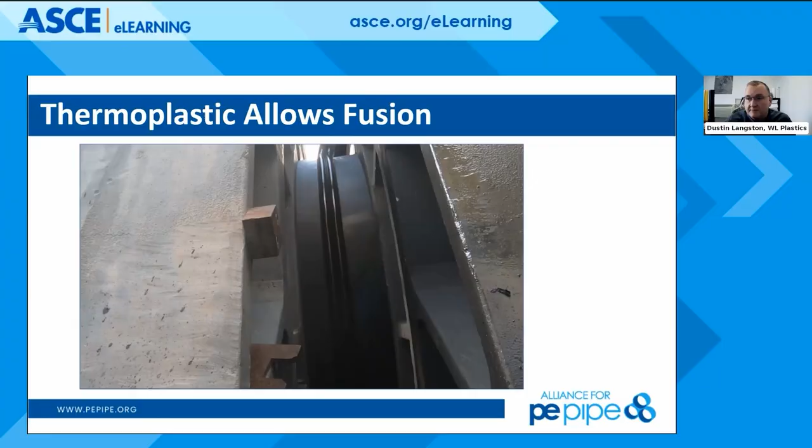And the reason this is possible is because HDPE pipe is a semi-crystalline polymer. It has regions of crystalline structure, and then it also has amorphous regions. This really makes for the best of both worlds, where you have a very strong material with high pressure ratings, but the amorphous regions help with ductility of the pipe. So you have a very good balance between strong yet flexible.

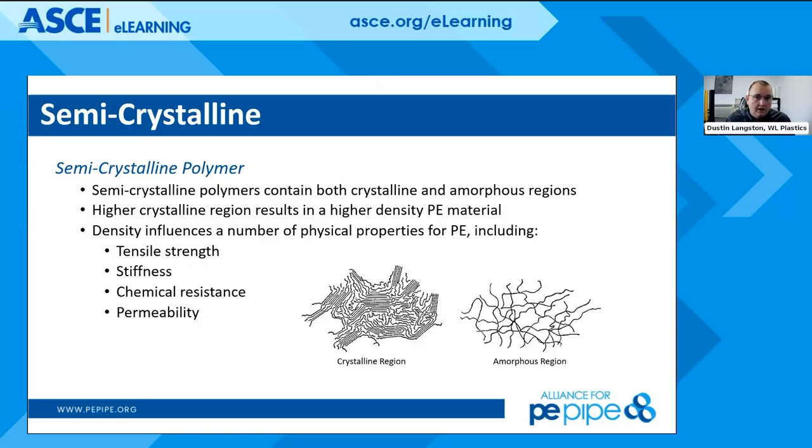But with that comes a little bit of a different mentality in how you think about plastic pipe. PVC and HDPE, both plastic materials, stress over time. It's not like a metallic where you have a tensile strength and then take a safety factor of some kind. You need to understand that with all plastics, you're going to have strength over time. So when you're doing a burial design, for example, you use the apparent elastic modulus for the length of time it's being installed - the 50-year, 100-year modulus, which is 29,000 PSI. Now if you're taking very short stresses, then you take a higher modulus - for example instantaneous, we'll get into that in the surge portion of this presentation, but then you'll take that 150,000 PSI modulus. So just keep that in mind: time versus stress for polyethylene and all plastics.

So Dusty, just for everybody out there, when that pipe is installed in an open trench condition, the soil that surrounds that pipe works together with a pipe stiffness and soil stiffness factor, so that after installation there's no more load on that pipe itself. So that's not a stress scenario once it's been installed, just to elaborate. Once that's buried and especially compacted, you have soil arching that actually takes the load of everything above it. But yeah, thank you very much for that, Alan.

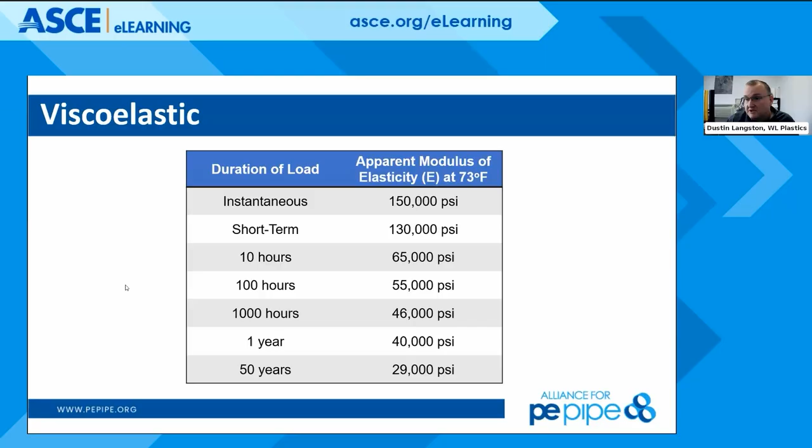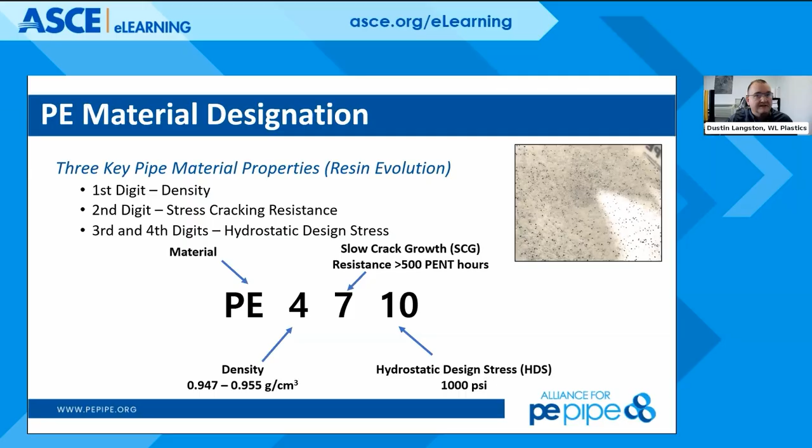So what is PE4710? If you go to order polyethylene pipe, that is going to be the material designation that you'll be ordering. We have model specs that Alan talked about before, and all those model specs call out PE4710. PE stands for polyethylene. The 4 is the density range, 7 is the slow crack growth resistance, or the PENT test value, and then 10 is the hydrostatic design stress. Every material out there now for pressure rated pipe is PE4710. You might still see some older specs from the early 90s that call out PE3408, but those materials aren't really commercially available anymore. Everything today is PE4710. I love this slide.

This data was developed and submitted to the Plastic Pipe Institute, covering all plastic materials for pressure, not just polyethylene but also PVC pipe. So we're going to understand, if we put pressure inside this piping product over a long period of time, what is that going to do to the material?

So for example, the tensile strength for polyethylene 4710 is 3,500 PSI. If you were to put 3,500 PSI of hoop stress on that product, you'd get a very quick failure. So we need to figure out at what point in the very long future can we put pressure in this pipe and just not have a failure.

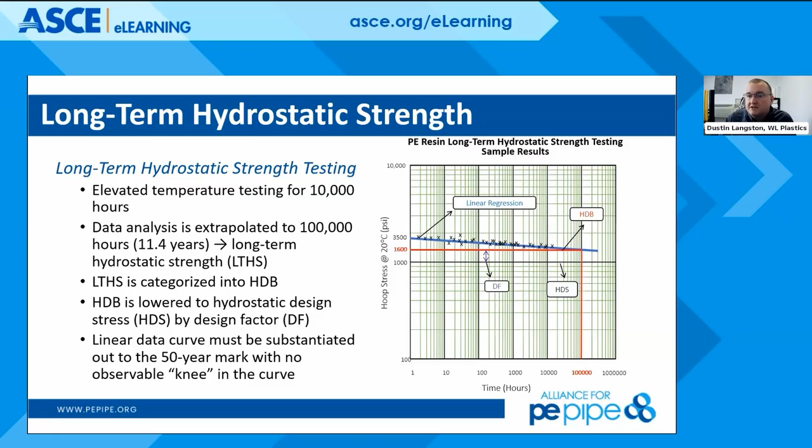Every DR pipe does have a pressure rating that goes along with it. Your most common are DR11, for example, rated at 200 PSI, DR17 rated at 125 PSI. Those are working pressures, what we advertise that pipe to be run at. There's no need for an additional safety factor, and DR11s are often run at 100 PSI or less.

That's definitely overkill. But this is the exact equation you would use to figure out what the pressure rating of your project would be. I will talk a little bit more about temperature though.

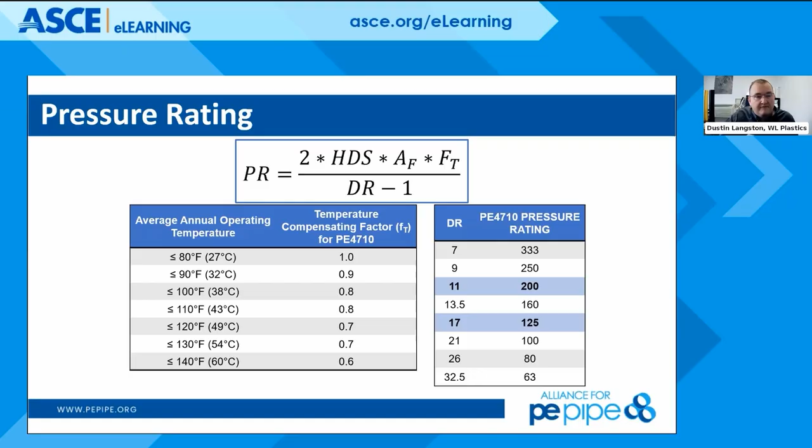I do want to mention anything above 80 degrees Fahrenheit, you start derating the pressure of the pipe. So if you have an above ground application that's going to be out in the sun in the summer, and that pipe's 120 degrees, you use a 30% pressure deration. You can get that from this chart or from the Plastic Pipe Institute handbook.

Perfect, now to the next one. We're going to talk about this a lot today: surge and surge analysis in HDPE pipe. It definitely acts differently than any other pipe material that you're used to designing with.

HDPE pipe, with that lower elastic modulus than our competition, acts as a giant shock absorber. So you actually get less surge in HDPE pipe than other piping materials. The other big difference between our material and others: you're allowed a 2 times pressure rating for occasional surges.

So a DR11, 200 PSI pipe can surge up to 400 PSI. And then for recurring surges, several surges a minute, it's a 1.5 times multiplier. So that DR11, 200 PSI pipe would be rated at 300 PSI.

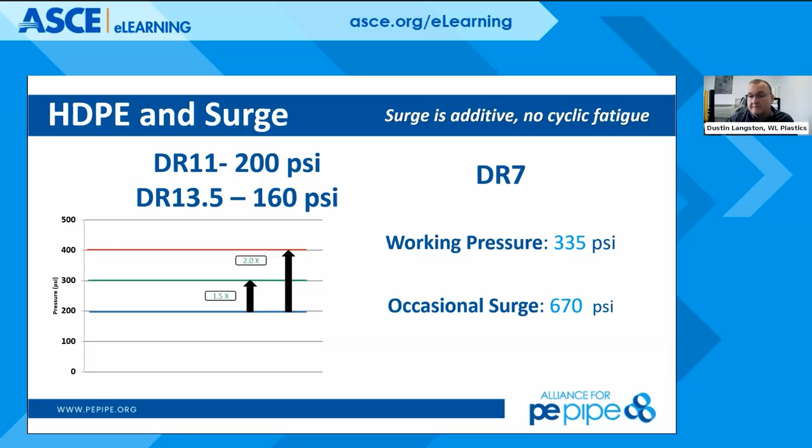DR7 is pretty extreme in this case. That's rated at 335 for working pressure, constant pressure, and can occasionally surge up to 670 PSI. So very, very high pressures allowed.

So what is surge pressure? Surge pressure happens when you have a velocity change inside of a pipeline. Fire flows are by far one of the worst scenarios that you'll come across, where you have a very, very fast moving water column.

And then all of a sudden the pumps are turned off on the fire truck, or a valve is closed, or even, if you're working with other pipe materials, if something were to clog the line and stop flow during a high velocity occurrence, you have a pressure surge, a water hammer event.

And these pressure surges are not just one direction. They actually reflect back through that pipeline. And so with HDPE pipe, again, that lower elastic modulus, we're going to reduce that water hammer through the pipeline. Go ahead, next.

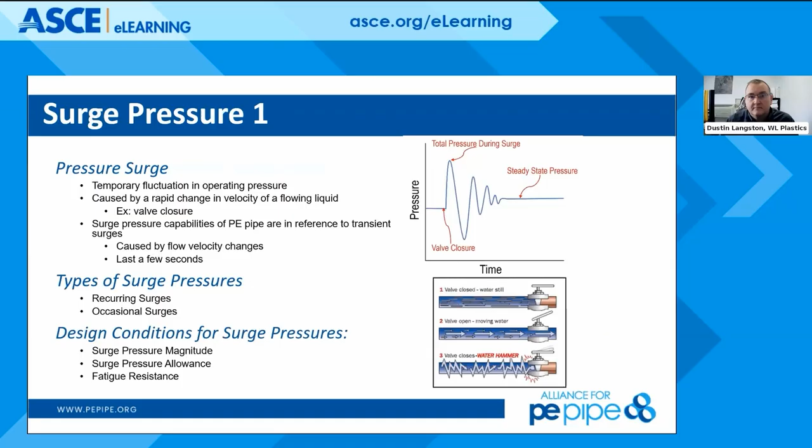So two factors ultimately affect surge: velocity change, and even more specifically, how fast that valve turns on and off.

You can get to very, very fast close times, and that'll actually give you a higher amplitude. But then again, there's the elastic modulus of that material.

Polyethylene pipe uses 150,000 PSI, PVC uses 400,000 PSI, and ductile iron uses 24 million PSI. So that results in a much higher surge in a ductile iron pipe at just 5 feet per second than you would get in a polyethylene pipe.

Alan: Yeah, so that's the exact summary I was coming on to say. Dusty, yeah, absolutely—so the HDPE itself can act as an attenuator in some areas to resist that surge, and that's the viscoelastic behavior we talked about. So you're hitting on all the parts, Dusty.

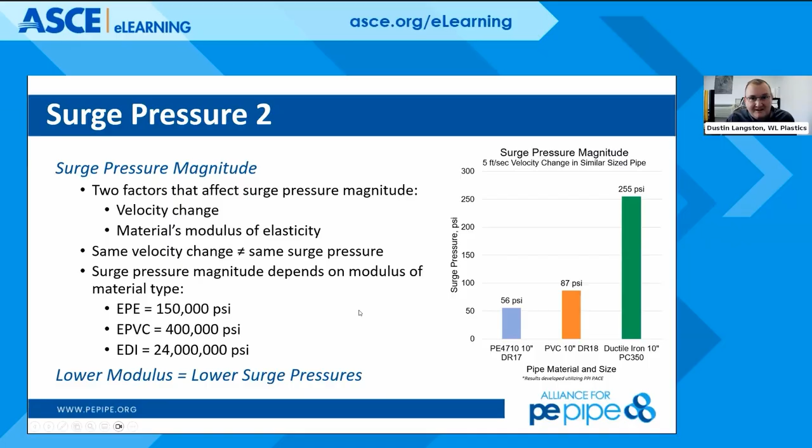Way to go, excellent! I think I've got one more slide on surge. Next slide—this is just graphical, us versus the competition, showing how you actually design for surge in polyethylene versus ductile iron versus PVC.

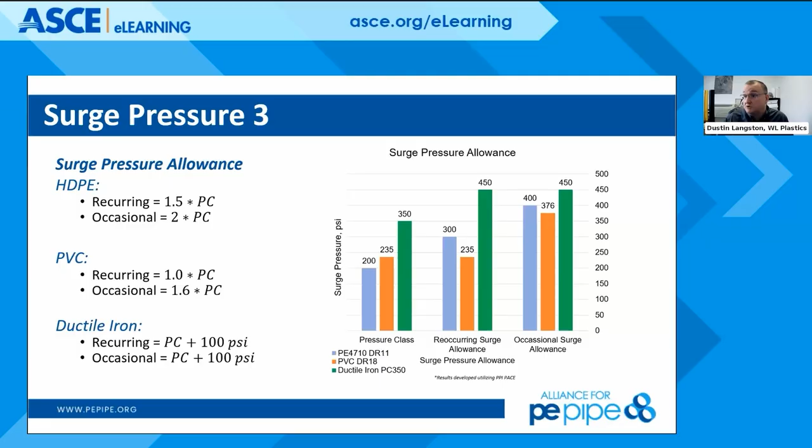For HDPE pipe, occasional surge is 2 times the pressure class, 1.5 times for recurring. PVC is 1.6 for occasional and 1.0 for recurring. Ductile iron is just the pressure class plus 100 PSI, which, as you saw on the previous slide, at 5 feet per second gets you well above the pressure rating for a ductile iron pipe.

And then fatigue resistance—not only do we reduce the magnitude of these surge events, but HDPE pipe is so flexible that it's not bothered by fatigue. Fatigue is actually not a design consideration for HDPE pipe; you don't really have to worry about figuring out how many cycles it can handle.

For example, the University of Texas Arlington did a test on DR17 125 PSI rated pipe, where they took it past 15 million cycles at 2 times the pressure rating and had no failures.

My favorite part of that test is that Harvey Svetlik supplied the pipe material for the testing. After the pipe was taken off test at 15 million cycles, they tested it for new pipe properties, and it passed all the tests for brand new pipe. So again, fatigue is not really something we're worried about with HDPE pipe.

In addition to the failure mechanisms, over insertion or over deflection of a bell and spigot joint can also provide some installation problems that plague bell and spigot pipe systems. But just like everything, we want to know how to install it.

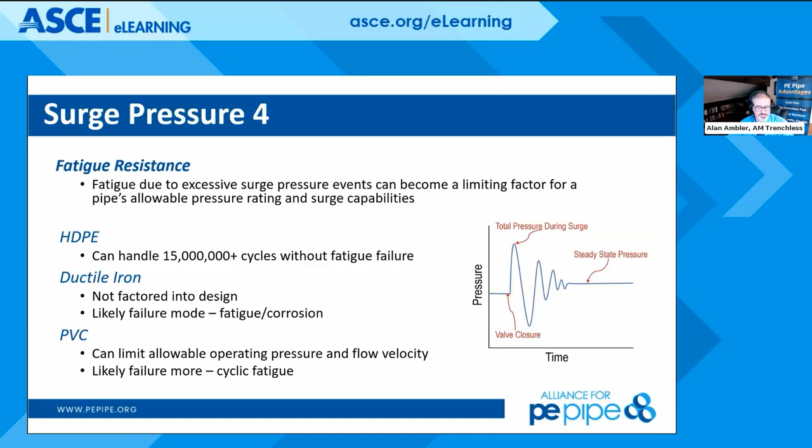There are a few other things to do with HDPE, which is why we do this educational component, and we want you to be successful in your installation. This was just a small subset of our 301 program—Dusty can spend an hour and a half talking about all of 301 itself and all the installation things, so definitely check out our YouTube channel for more.

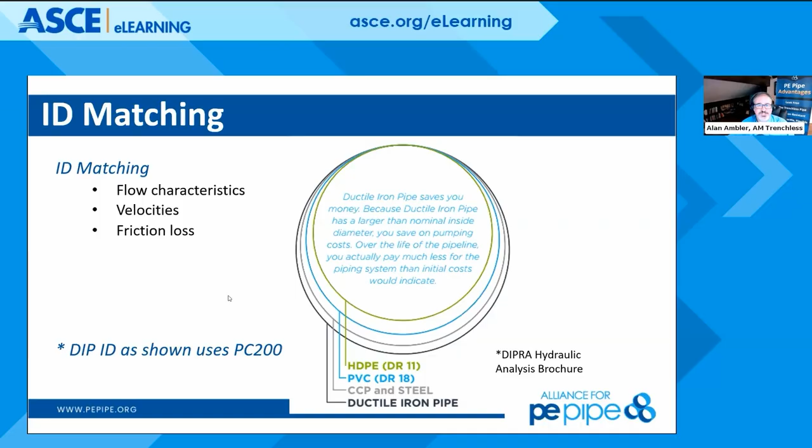If you wanted to, you can look at DR13.5 as opposed to DR11 in some municipal networks, because most don't operate at 200 PSI—they're more in the 55 to 70 range, if that gives you some pause.

But over time, the inside of a metallic pipe is going to decrease in its friction factor, while the plastic pipes simply won't decrease in that time period.

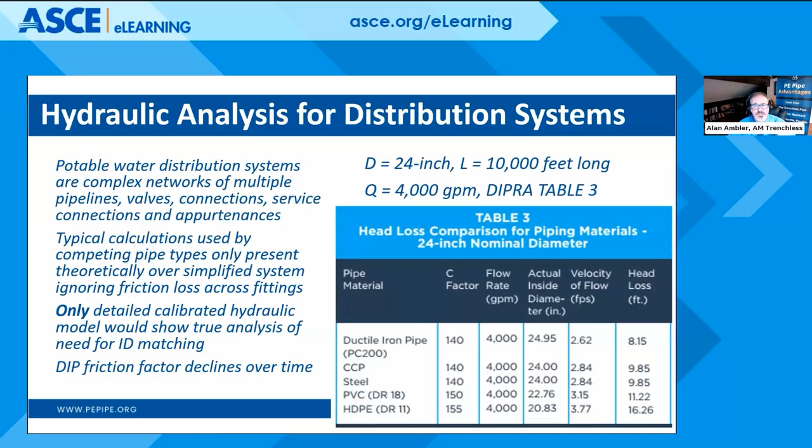So the bulk and bevy of this presentation is to bring you information about hydraulic modeling, why it's necessary, and how it can really be the only way to estimate your friction loss throughout the pipe, especially when we've got complicated systems.

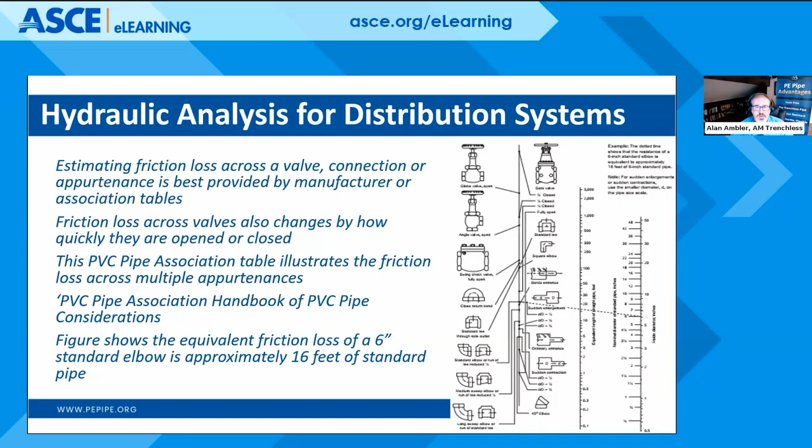Obviously now computer modeling gives us a great tool in order to develop that hydraulic model and actually look at the actual pipe materials and the size of the pipe through this.

Here's a good example of taking pipe size and the impact of fittings into account. It's not just one theoretical length of pipe with no connections or appurtenances. As you can see here, for a 6-inch pipe, a globe valve, if fully open, adds 172 feet of equivalent head loss along that pipe. So we have a whole lot of things to consider when looking at head loss through these fittings.

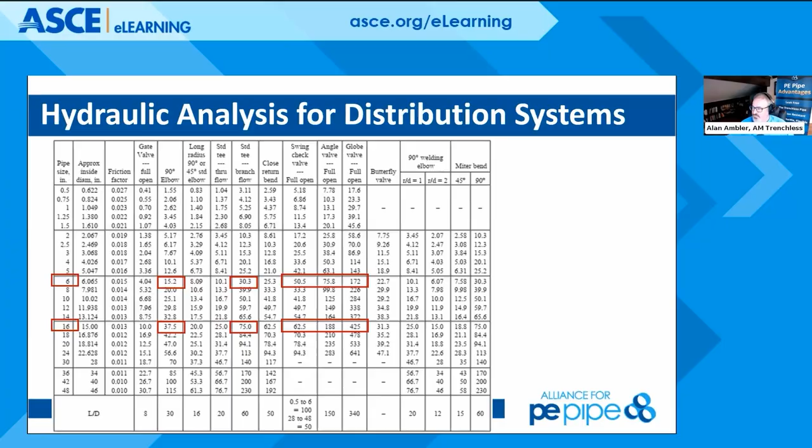Everybody thinks hydraulic modeling is kind of this black box, but realistically it's just a bunch of calculations taking place. One of the big things I always like to point out is if you don't have very good information coming in, you're not going to have very good information coming out. So garbage in, garbage out. But ultimately, it's not a black box.

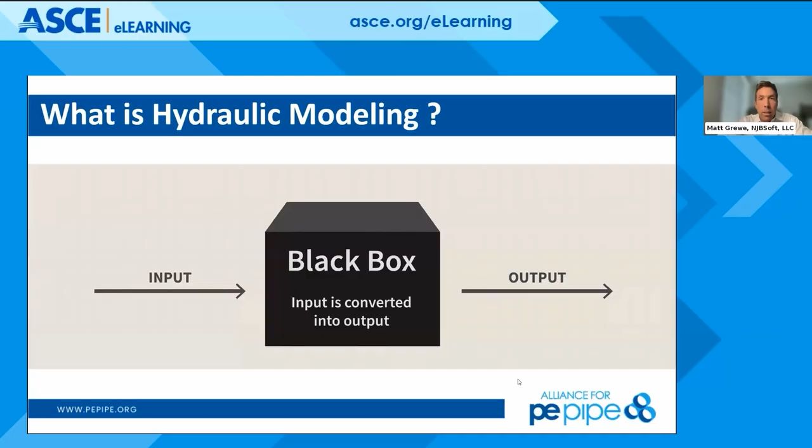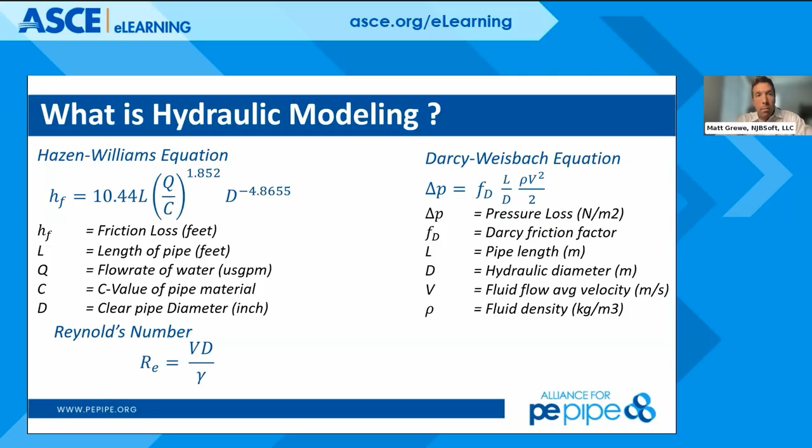It's simply nothing more than a bunch of equations put in place, whether it's Hazen-Williams or Darcy-Weisbach, or Reynolds numbers, there's pressure loss equations. There's a lot of different equations being manually calculated, and that's the simplicity of it, to have us focus on being able to structure what we need to.

We've got free discharge, which represents hydrants or tanks, and how water leaves and enters the distribution system under pressure in those applications.

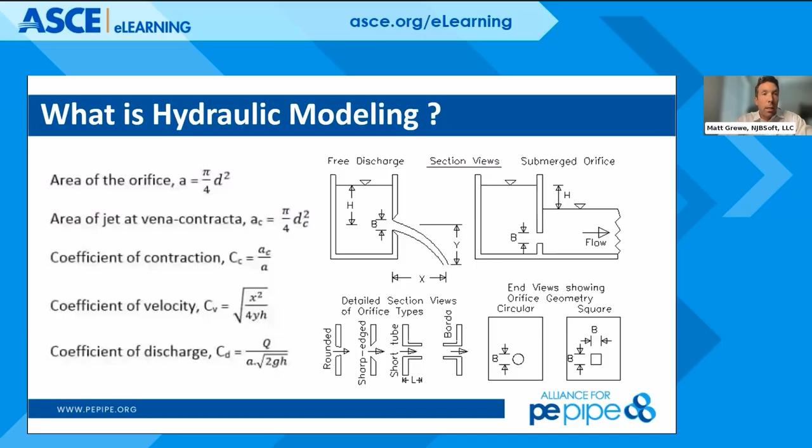And then ultimately you have the Hardy Cross method, which allows you to understand how water is flowing within the network. Just to do one loop with hand calculations would probably take me a day, and I'd be exhausted after that. Being able to do large networks is very complex, so the model is there to simplify it. This allows us to get a better understanding of flow direction, looking at individual pipe sections, and understanding the conditions and constraints you're really trying to design and understand for that particular application and need.

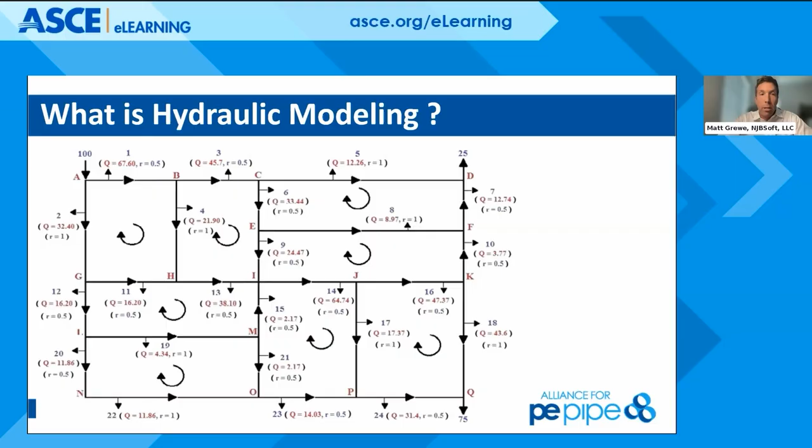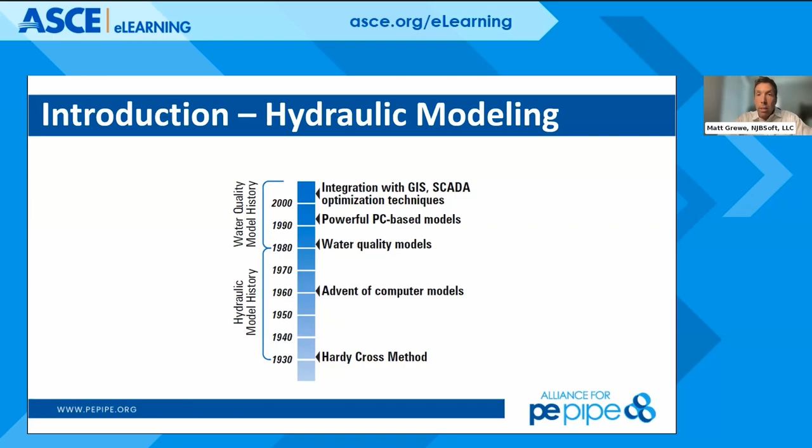What a lot of people don't realize is the Hardy Cross method was developed back in 1930, and computers started around the 1960s. Really with more powerful PCs in the early 90s, modeling started to take off, and we were able to do more computation and get a better understanding of where things are. With that, our ability to do diagnostics and next steps is really powerful. A lot of people don't realize how long ago modeling actually started and how long it's been around. It's not this black box or something new—it's proven, using existing equations that have been done for decades, if not centuries, to understand what's going on in our systems.

There's a plethora of different applications you can use hydraulic modeling for: understanding hydraulics, figuring out cleaning methods, understanding water quality, or even just system optimization. The main things we want to focus on today are fire flow, because using fire hydrants we can start to understand specifics of sections of pipe; cleaning methods, whether it's worthwhile to do different cleaning methods and what's the benefit of those; as well as transient analysis with surge and understanding the complexities of that.

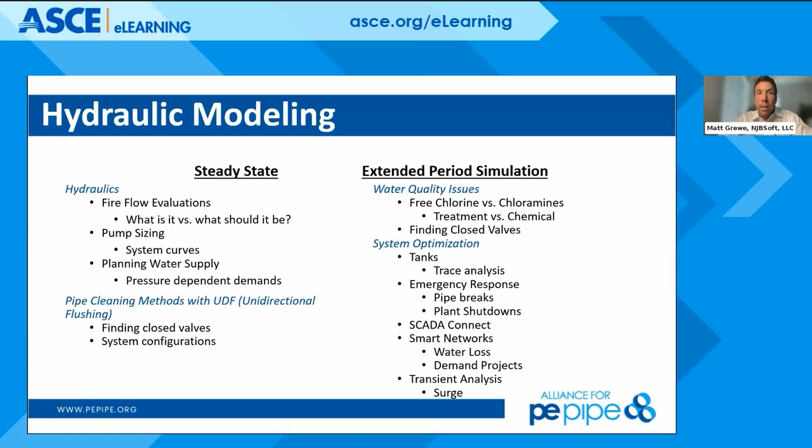There are main categories you need in a hydraulic model. You need water main information, which determines material and diameter—ultimately the material impacts the friction coefficient. Then tank information and pump information. While these aren't technically related to pipes, they are related to understanding the movement of water and how different parameters react within the system. All of these are really needed to generate the model and then move toward the calibration phase.

I will say in the last 15 years, GIS has been one of the proponents to help increase hydraulic modeling's capabilities.

Previously, it used to be very skeletonized, very simplistic models. As with GIS, we're collecting more information. Same way with asset management, CMMS, more information is being included. You get more detail, right? And as you get more detail, more assets, you're able to better understand and do different analyses.

One of those is looking at inside diameter. That was a key point, right? Obviously, HDPE has a smaller inside diameter, but ultimately it has a higher friction coefficient. So while it looks like you're restricting flow, you're actually not, because you're able to put as much, if not more, flow, since you have less friction to account for the head loss side of things. So capacity-wise, understanding those differences and what those look like.

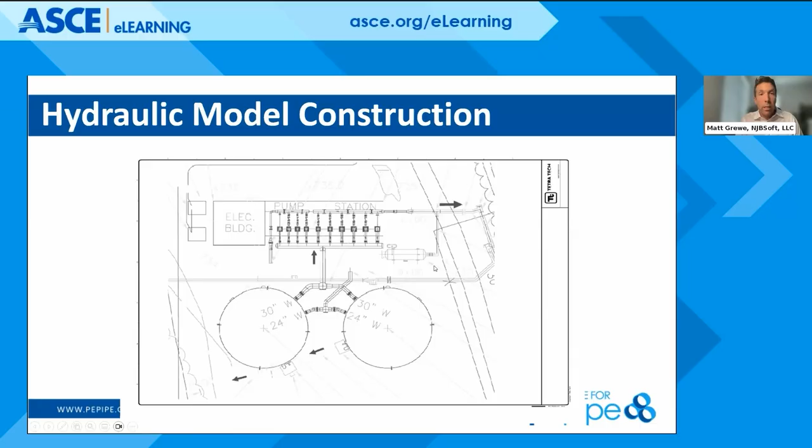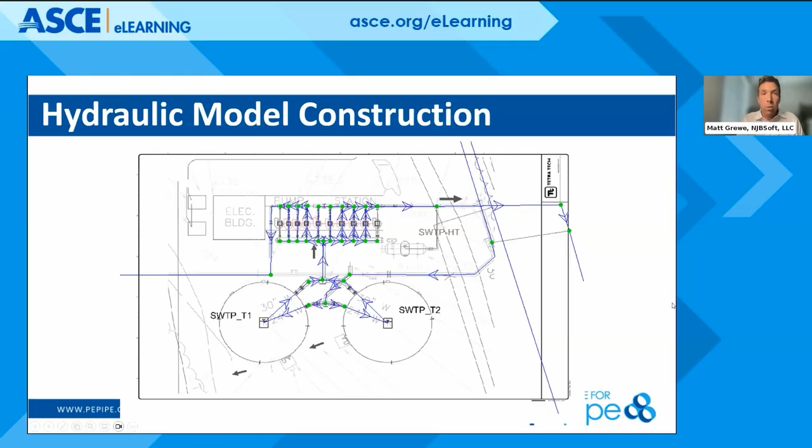As with GIS, you start and you add more assets and infrastructure, it only makes the model more accurate. Again, garbage in, garbage out. The more information you can put into the calculations, the better the output you're going to get, the more realistic things are going to start to turn. With GIS, we're able to actually overlay the system itself, and you can put pumps on actual pumps and get an idea of how the manifold and the tanks all work together to supply the system and what that looks like, to ultimately understand the network as a whole as well. So model construction has taken a big leap with this as well.

One of the big key components is obviously demand, right? Whether that's wastewater flow in or providing water network demand out, being able to understand what that looks like. As you add more assets and infrastructure, being able to delineate where that flow is being added and understand what the impacts are. Obviously, pressure is key, and being able to understand those hydraulic grade lines and what that looks like. That's a key valid point, making sure we have accurate demands applied appropriately in the system and network where they need to be done. And that's all part of the calibration phase.

Next slide. Hey, Alan, I've got a quick question for you. One of the questions that came up a couple times so far is, what's the basis for polyethylene C factor being consistent with PVCs?

They're both plastic materials. I'm not sure if Richard or Stephen would like to elaborate in more detail, but they're both plastic materials, and that doesn't corrode. So over time, that C factor stays. Stephen, you got something for us? Yeah, real quick, Alan. So that's a good question. The C factor for polyethylene comes from actual laboratory studies, full flow studies through a polyethylene pipe with fusion joints in the pipe. From that calculation, the pressure drops, things like that, the C factor was actually calculated to be about 160. But we regularly go out with 155, 150 to 155, as a little bit conservative. And it stays consistent over time. There's no tuberculation, no corrosion, so it doesn't change and decrease your flow capacity with time as well.

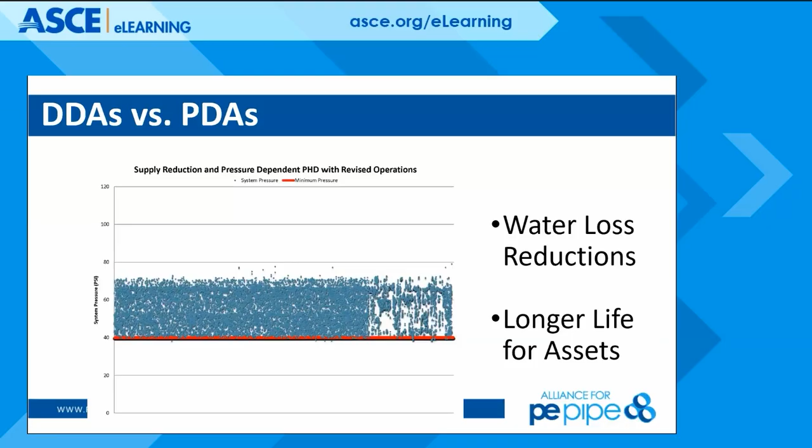The issue a lot of utilities have is—Alan, go to the next slide—with a model, you can figure out where to operate to still meet your minimum compliance, and figure out what that is. You reduce water loss, but you're also cutting your revenue. You can also revert that to increase your revenue and get an idea of what that looks like. But ultimately, the whole point is looking at longer life for your asset and figuring that out.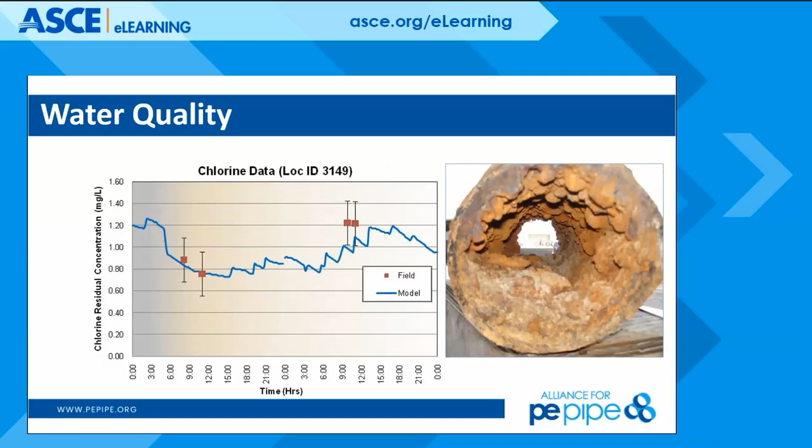With plastic pipe, it stays clean—there's no tuberculation. When you start to have tuberculation like this, the surface area increases, and within different sections you're not getting the same result based off your calibration results, and you need to understand why. You'll see that divergence.

The other effect of tuberculation is it reduces your capacity. It increases places for nitrification to take place and hide, impacting other parts of your water quality. Once you get this all figured out and calibrated, you can accurately predict—you can simulate and actively predict both a clean, smooth pipe as well as a tuberculated pipe, and get an idea of how that impacts your system.

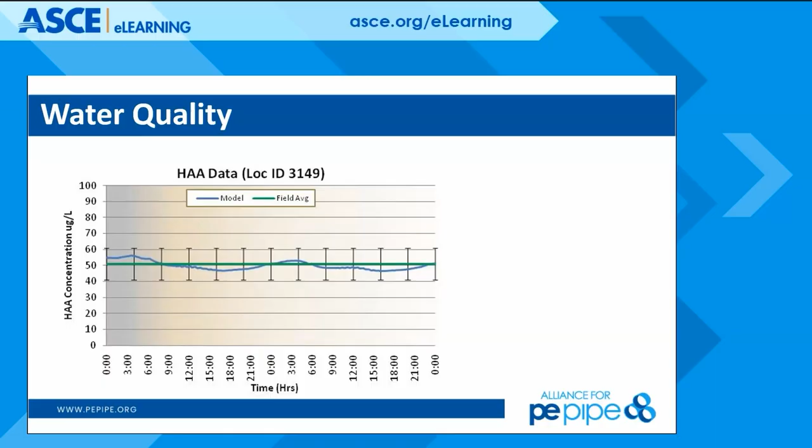But again, a lot of diagnostics go into understanding the impacts of a particular pipe section. Next slide.

People always ask me, do pipes need cleaning? Absolutely, it does not matter. Iron obviously has a lot of color, and you're trying to meet that supply. One key point here is hydrant flushing, whether it's unidirectional flushing or just random flushing. When you start taking pressures and do that amount of flushing in your system, you're going to learn a lot about your system just from the pressure itself.

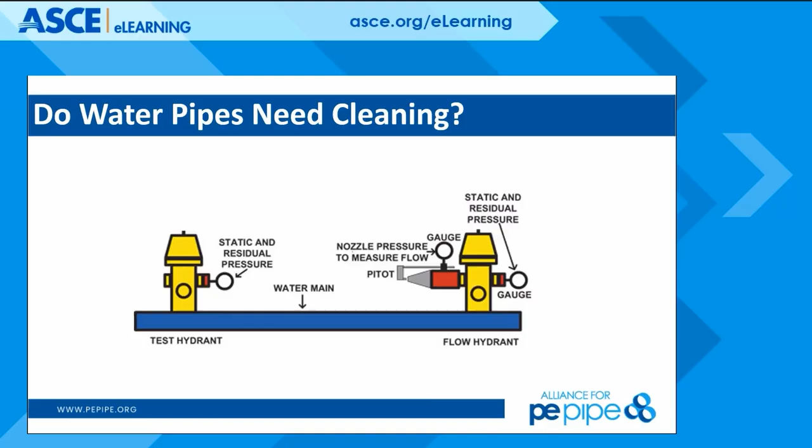Typically you have to have a known flow, and then with all your other physical parameters and the pressure you're monitoring, you're able to understand what that looks like. So we've got our diameter of pipe section that we're analyzing—we know what that is. We basically need an upstream and a downstream pressure that represent our hydrants.

We can also do this in wastewater, and I've got an example where you deadhead the pump, and you can look at the pump with its flow rate versus an ARV. But again, we're looking at that pressure drop to determine it.

The main factor we're trying to understand here is looking at the friction factor and how that pipe is impacted. So we can rearrange the equation—go ahead and click next—and we're actually solving for F at this point, and we get an idea of what that looks like for our friction factor.

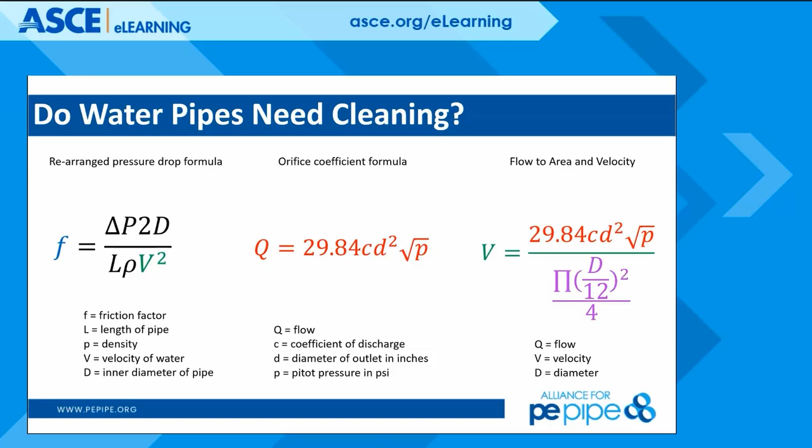If we need to take it more complex—so that was the simplicity of a known flow rate—the problem is when we're dealing with two hydrants, we don't know what the flow rate is. So we have to use a couple other equations. I'm going to go through these pretty quickly, but this is the engineering side of the presentation. Basically, we're taking three different equations, and Alan, you can start to step through these—you'll follow the colors, and the colors represent where that equation is being placed inside of the next equation to ultimately bring it back to that pressure drop equation where we got it all tied up. We're using all three equations to get an idea of really what that friction factor is for that particular pipe.

And we don't need to know flow. All we need to know is diameter, the pressure drop, and the length of pipe, with the density of water.

We can do all the testing and all the sampling and monitoring that we want, but ultimately during construction, stuff gets into these pipes, and being able to flush those out is important. You'd be surprised what can hide inside that sand inside a pipe. So it's good to do flushing.

Pipes, and they start clinking around at the hydrant level, and they end up having to take the pipe off or the hydrant off to get out whatever's in there. So it's very interesting to see what comes out of these things when you're doing these programs.

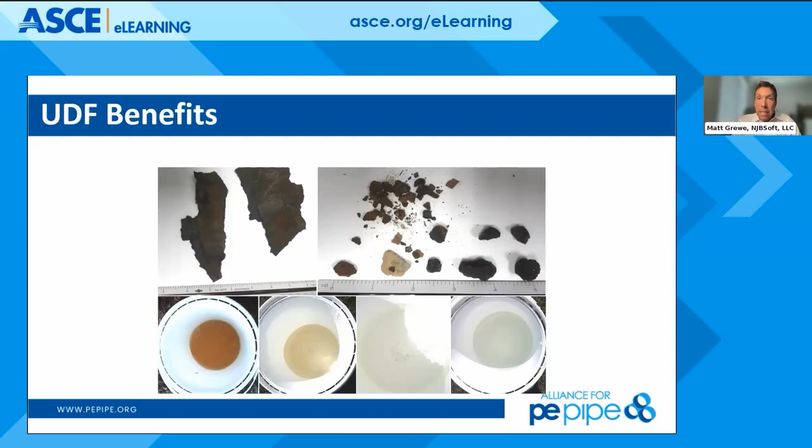But the benefits behind it: cleaning the system, providing a level of maintenance to your customers, as well as understanding the system as a whole, so you can get a better idea of calibration.

Next, we're going to look at force main, and this was... So go back one slide, or one more slide. Go one more click. You can see the divergence.

These are actually opposite, but you can see the divergence before the line was actually pigged, and you can see how the model wasn't able to keep up with actual real-world results doing that pressure and flow test.

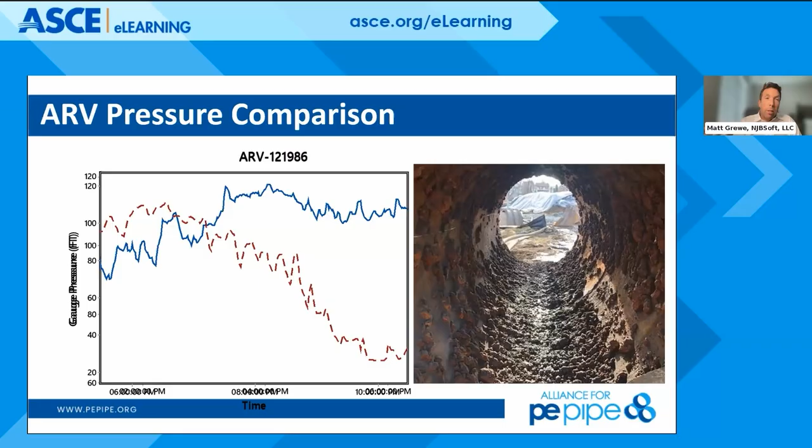But go back one slide, Alan. Then you can see where it started to line up, where we're able to calibrate at least, and then get to the next stage. So go 2 clicks now.

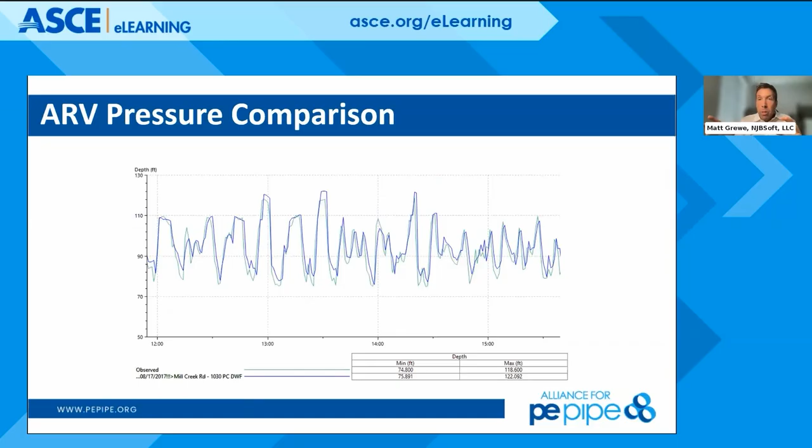And after we were done pigging, we were able to line it up. When the pipe was clean, we were able to see where the results laid, and you can see the model actually had a really good result.

The whole point of these is the model can show you, and you do this by changing your C factors, right? So you might have a tuberculated ductile iron pipe that could be as low as 60 or 80. And you can bring that back up to maybe 110, 120.

But that's what I said - even with the inside and outside diameters, moving to an HDPE plastic pipe like that, you get a significant reduction in head loss on your energy grade line, where you're able to increase capacity in the ends.

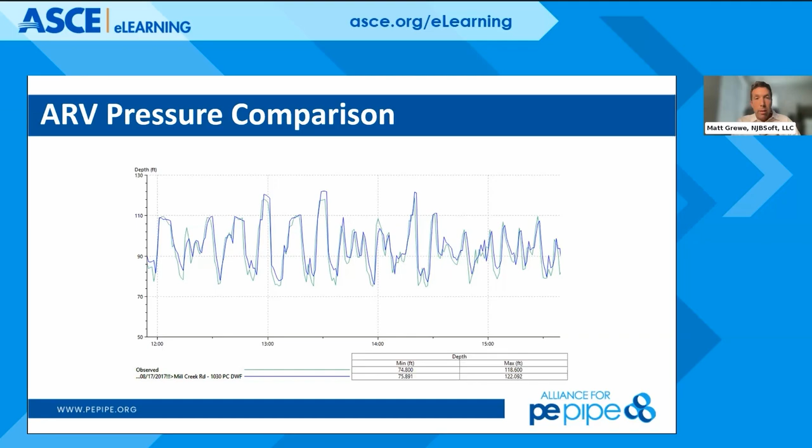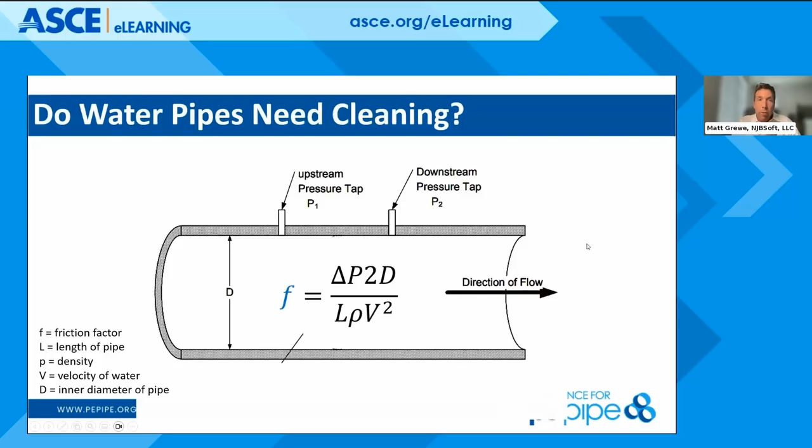And with this, it's really simplistic, where we're just using that very simplistic equation because we know the flow rate this time. We don't have to use Q to try to figure out pressures and all of that. We know because we've deadheaded the pump and we're looking at an ARV downstream, understanding what that looks like on the pressure on the ARV side.

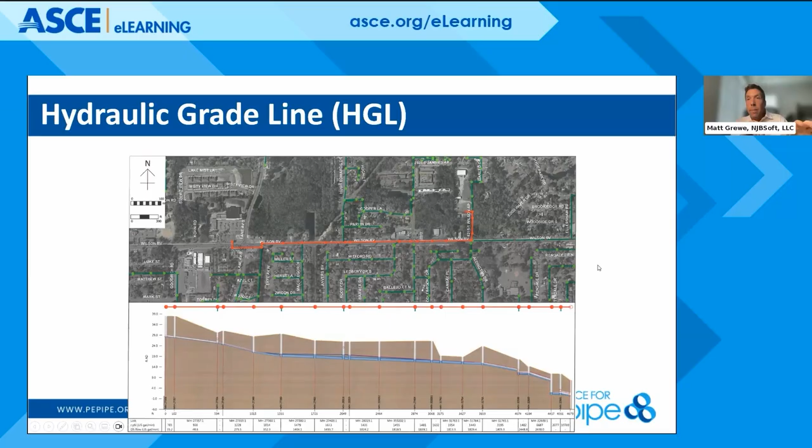Lastly is surge. Surge is one of the very big issues - nobody really cares about it until it happens, and then everything breaks loose and people are going, well, I don't know what happened.

The number one cause of surge is power failure, right? So electricity going out of the facility - even with a transfer switch and a backup generator, you still have 30 seconds before that generator kicks on and power is restored, and there's a surge wave going through your system at that time. Being able to understand it and try to mitigate it as much as possible.

Pipe material is one of those things, obviously. Adding ARVs, right? You'd be surprised how much an ARV can help. Alan, next slide.

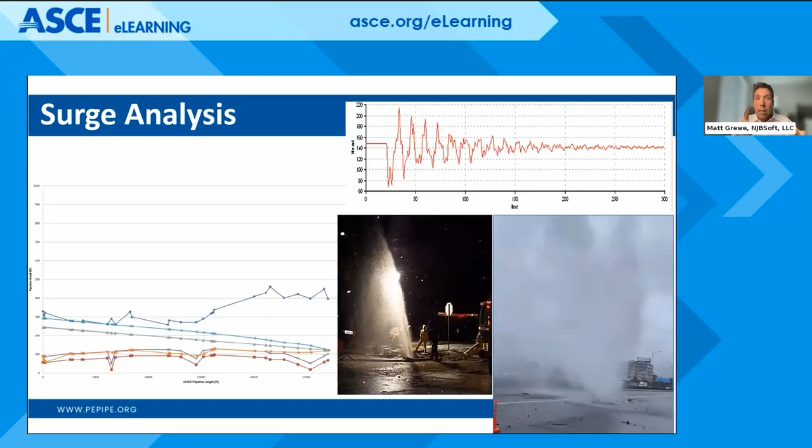Oh, this one's really cool. This will help answer some questions we had about water hammer and fatigue. I was most excited about this. I also have another question to answer after you go through this slide. So keep going, Matt, you're doing great.

Sure, so this is the static version of surge, and you can get an idea. The blue line is your max, the green line is your standard operating pressure, and red is your minimum pressure surge. This is the result after you've stabilized it and got a nice system that's designed. Before that, you would go down to negative 14, which is beyond physics, you can't go lower than that. And then you would have something above 300-400 psi with surge spikes on it.

So Dusty or Richard, if you want to take some of this: the surge allowance that we mentioned previously for the pipe material design does allow from 200 PSI on a DR11 up to 400, and that occasional surge happens about 6 times a day.

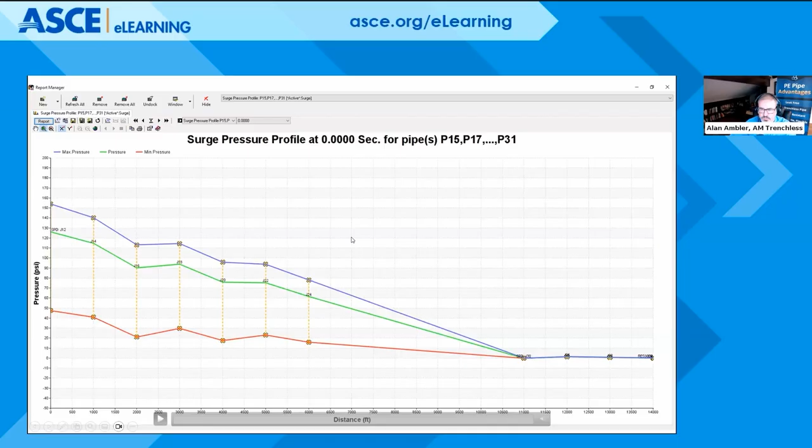We'll get to calibration here in a few minutes. Did you have any more on these slides, Matt?

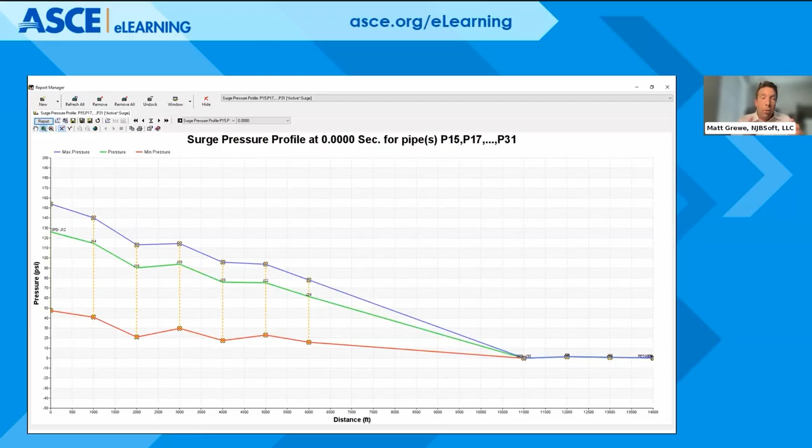Yeah, my main point is you're looking at understanding your particular application, right? You've got to understand the constraints and what you're trying to design around, and what makes sense for you. Different resources have different applications, and being able to understand that. A model allows you to test those constraints, understand what they look like, so that you can ultimately make the proper decision and select what you need to select appropriately.

One of the most interesting things about Matt is his willingness to help in any way, shape, or form. We haven't really worked directly together since my days at Castleberry many years ago, and now Matt's doing something completely different, so he's going to tell you a little bit about what it is that he's doing here, and let us know, because somebody out there's got to have service for you.

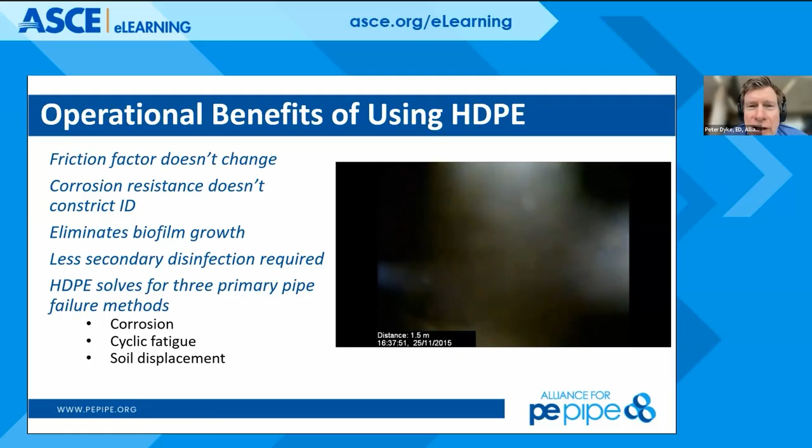Pete, you got something you want to share? Yeah, a great question came by, Alan. I wanted to share it with everyone. It relates to: what is your metric for a completed model calibration? Do you want to get within X PSI of hydrant flow tests, or is there a different metric for calling your model calibrated?

I absolutely love the question because the next section for us is all on calibration of that hydraulic model, and we'll make sure to address it there.

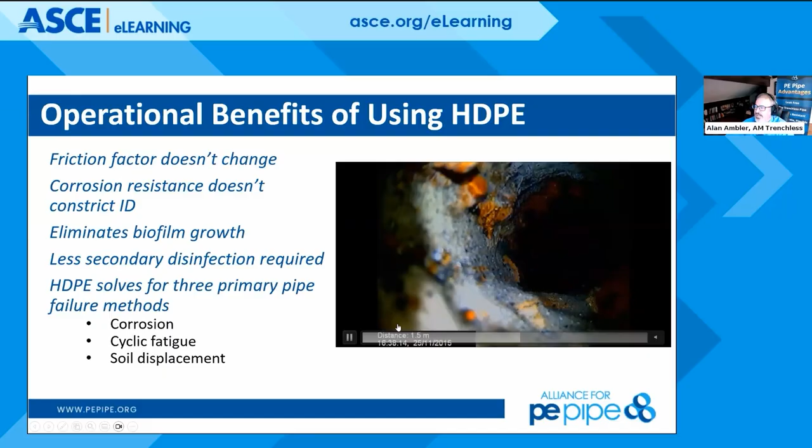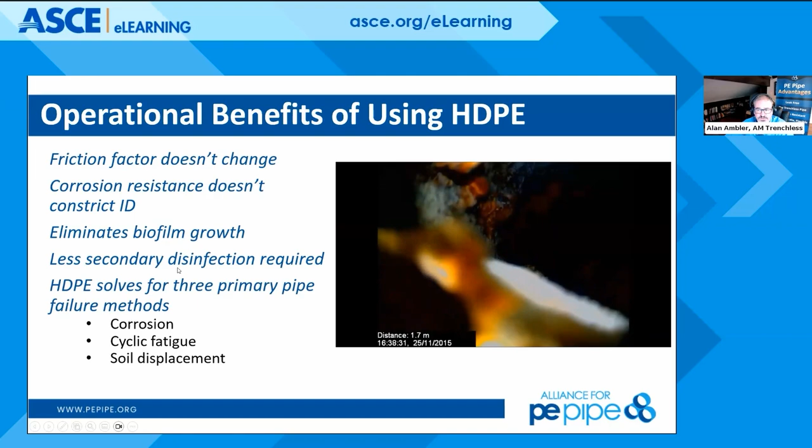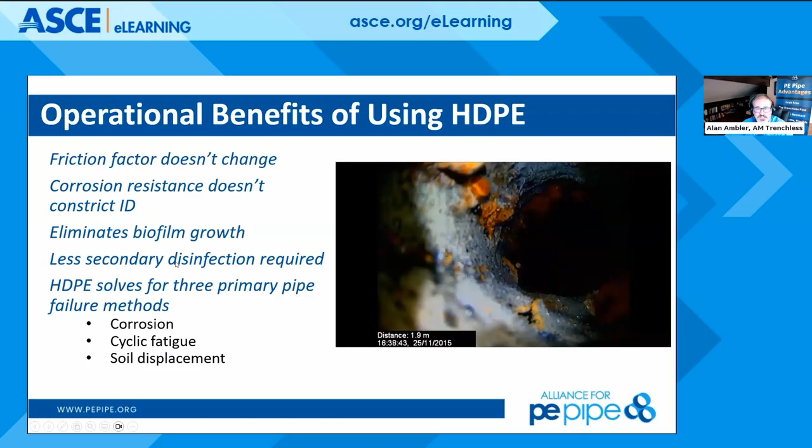So what we're looking at now is a live inspection of a metallic water main. It started off as PVC, transitioned to another water main, and we're seeing a liner within that pipe, a bituminous liner that's broken apart, which can encourage biofilm growth that we eliminate by going with a plastic pipe material. There's a lot more benefits of using HDPE, not just for the hydraulic model you're now learning about, but also corrosion resistance and soil displacement resistance, since each joint that we fuse together is as strong, if not stronger, than the pipe itself. A lot of good things come from using that plastic pipe material.

So with that, I'll bring Emily on, and she'll tell you about her experience directly calibrating and using the hydraulic model for the Metropolitan Utilities District, so we'll have the actual real world scenario now. Glad you're here, Emily. Excellent. Yes, thank you guys very much.

Yes, so calibration would be the next step in your hydraulic modeling journey. After you go through the effort of setting up that hydraulic model, we need to really make sure that it is reflecting reality. So calibration is comparing observed values to modeled values, and then going through that iterative process. Usually we're combining results and measured values into tables and graphs, and then focusing on areas with large differences to try to really shore up that hydraulic model.

Typically we're addressing those C factors, the roughness of pipe we've talked about periodically, demands of the system - residential, commercial, industrial demands - making sure that's reflecting reality. Then QA, QC, just that sanity check, making sure the data was input correctly. Are those valves showing open or closed? Are the variables assigned correctly? Are you showing a 4-inch pipe when maybe that was supposed to be a 42-inch pipe? That can have a great impact on your system.

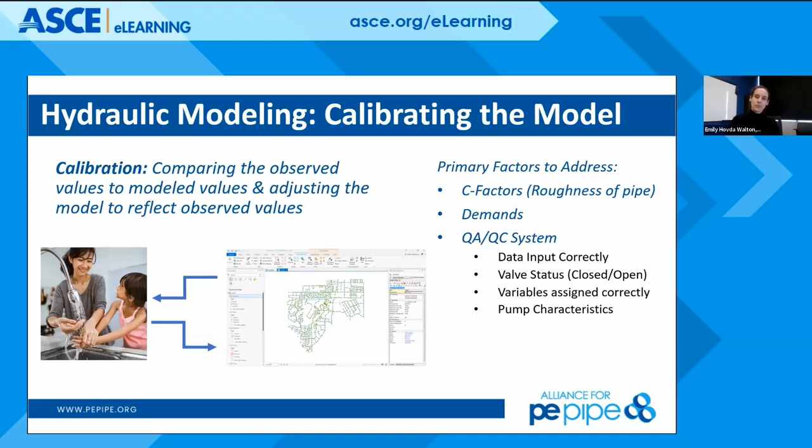So model calibration, I've defined it slightly different here, but basically we're just trying to bring that model in alignment with field conditions. There are a couple different ways we would calibrate the model - whether that's hydraulic, maybe looking at water quality, steady state, extended period simulation, or looking at micro calibration. There's a really great resource: AWWA, the American Water Works Association, has a manual of water supply practices, M32, which can elaborate on all of these calibration practices and hydraulic modeling in general, if you're interested in learning a little bit more.

Hydraulic calibration would be verifying pressures, flows, tank water levels, and making sure they are accurately simulated in that model. Water quality - we're modeling chlorine residuals and disinfection byproducts, which requires initial chlorine concentrations, decay curves, and decay coefficients, so it's fairly complex. Steady state - we're modeling the system at a specific moment in time.

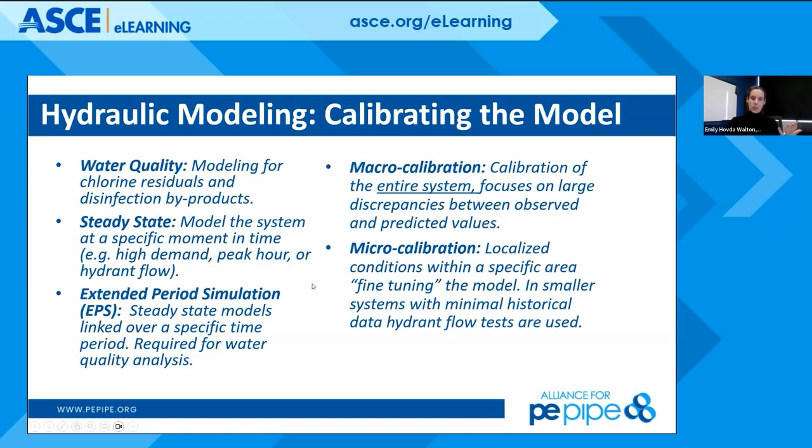So looking at maybe a peak hour or a hydrant flow scenario. Extended period simulations - typically we're looking at those steady state models linked together over a period of time, maybe 24 or 48 hours. That extended period simulation is required if we're going to be looking at water quality, because we need to see how that water quality deteriorates over time, so that's part of the requirement there. Then micro or macro calibration - looking at the entire system from macro to micro, making those fine-tuning calibrations.

So remember, those field data inputs are not foolproof - they rely on human input and human action. Were those as-builts updated correctly? Historical information, maybe it's not as accurate. Maybe we're looking at the wrong section corner. Maybe the hydrants that you tested are not on the same network, which can certainly happen. And then the model also is not foolproof - it was usually updated by humans.

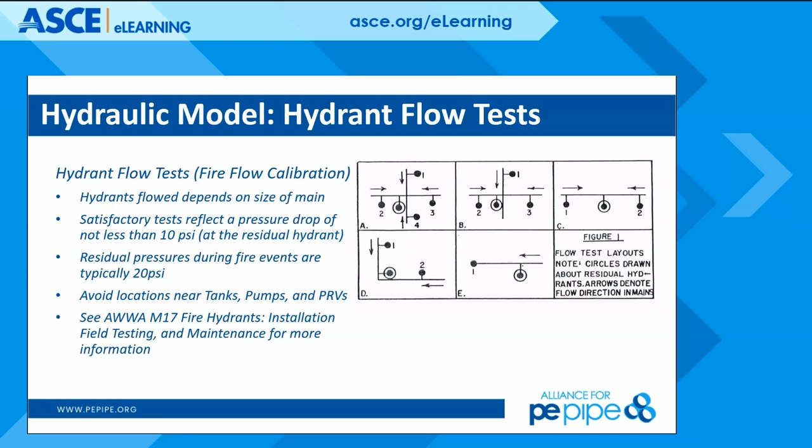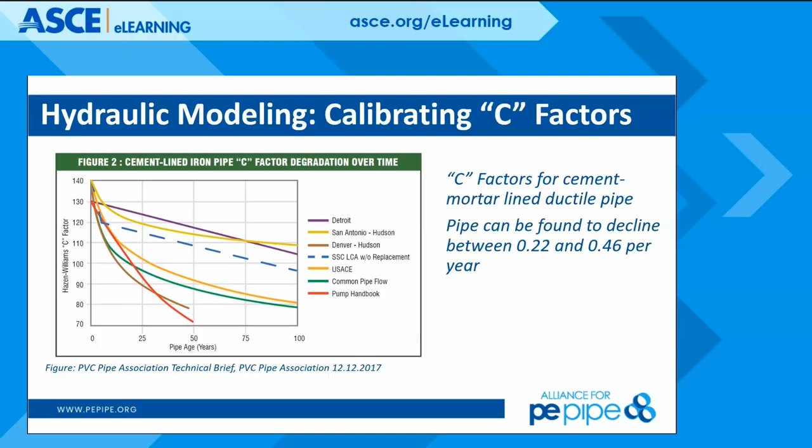AWWA M32 has additional information, and most of us may have an idea - we start out maybe near 140 and then degrade shortly thereafter. But the real way to figure out what that C factor is, is to get the hydrant flow tests. So we would typically recommend that to just verify.

So additional calibration methods would be looking at demand. There's a couple different demands that you would be running your model on. So we look at the average day demand - that's the total water used in your system divided just by 365, so pretty straightforward. Maximum day demand is the maximum recorded daily demand representing the single highest demand for a given year. And then peak hour demand is the water demand during the hour with the highest system demands.

Demands can go up and down throughout the year. Typically you're going to see those peaks during the summer, and then the winter months will go a little bit lower. The type of scenario you are running will usually dictate the type of demand that you want to use. Some of the highest demands I've seen previously in real life were during the Super Bowl, when everybody's out and about or at other people's houses using that system. Or water main breaks, firefighting events - all of those are going to give us some of that peak demand.

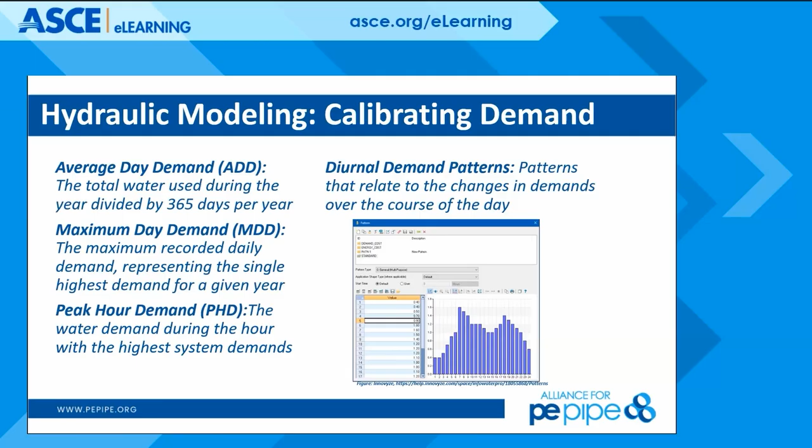Isn't that right, Emily? Yeah, certainly. To be a little crass, yeah, we would call it like the super flush. But oftentimes during the summer we'll see high irrigation loads. Sprinkler companies will often just program those irrigation sprinklers to run Monday, Wednesday, Friday, starting at about 6 or 7 a.m. So if you drive through any new neighborhood, you may see all of those sprinklers triggering at about the same time. That can definitely put a large strain on your system.

And it can be troubling, certainly, when you're trying to run the system from an operational standpoint.

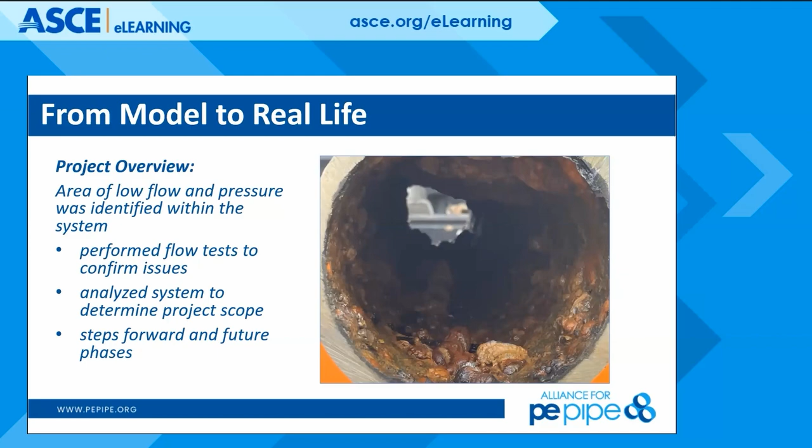They were incorporated into the MUD system about 20 years ago, and prior to joining MUD, they ran on wells. They had some secondary or aesthetic water issues, primarily iron and manganese, I believe - that was before my time. The suburb saw some increased growth, which led to increased demand on that specific pressure zone, especially during peak hours during the summer. So we created a project to try to develop a solution for those low flow and pressure issues they were having.

So we conducted a few hydrant flow tests to try to calibrate the model and then develop a plan of action and determine a fix.

Great, I hate to interrupt here. Richard, go ahead. Hi, Emily.

I had a great question that came up when calibrating the flow test. How much percentage of error is allowable?

Allowable? I generally try to get it as close as possible. I know that's not a great answer, but I think it just generally depends on what you are trying to model and what you're trying to fix. In this project, we were replacing a lot of the infrastructure, so we were just trying to get it pretty close. I was able to get it pretty spot on.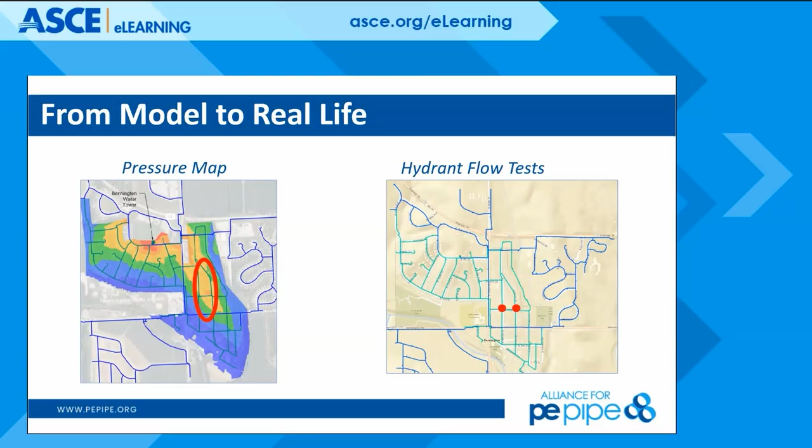So once you're able to run those models, there are different calibration methods depending on the software you're using, so you should be able to get the calibration pretty close. It depends on the calibration method you're using, whether you're looking at the pump curves or just the sizing of the pipe. But generally those hydraulic models will allow you to get pretty close.

Thank you very much.

So we were able to target this area here highlighted in red. It was specifically older cast iron mains, some of them 4-inch in diameter. Those hydrant flow tests were really important for us because, as I mentioned before, we took over this area, and material information and age of the pipe was maybe not exactly known. We estimated it to be installed in about the 1950s, but there's not great historical data for us.

So mains were 1950s-era cast iron ranging from 4 to 6 inch. We targeted that for a pipe bursting project. Some of the areas were open cut as well. Existing sizes were 4 to 6 inch, and we did either size-for-size or one size up, so we left no 4-inch pipe for that pipe bursting project.

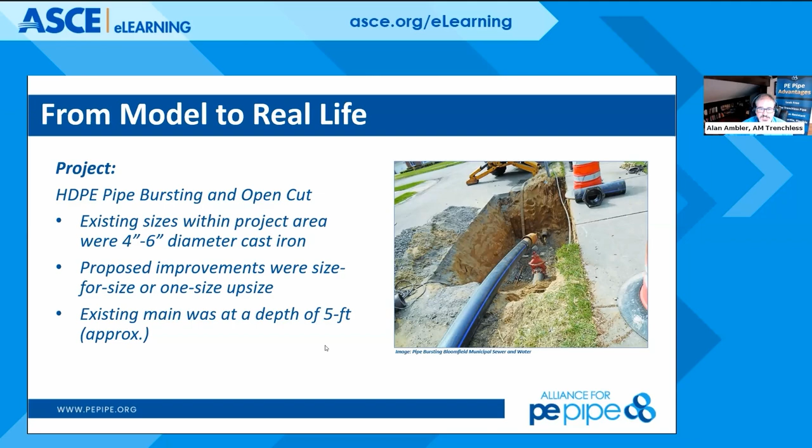We've had well over 70 questions and we're cruising right along. We only have a few more minutes left, but let's get to the heart of what you've got, Emily. This slide captures the end result of bursting old cast iron mains, so walk us through what's going on here.

Yeah, so we conducted those pre-improvement hydrant flow tests to calibrate our model, and then to test how the pipe bursting project went, to ensure we delivered a better project and higher level of service than those customers currently had. Those initial flows were pretty low, as we suspected, less than 1,000 GPM. We were targeting close to 1,500 to 2,000 GPM as a design target, and we got results better than expected. We were seeing over a 150% increase on those hydrant flow tests.